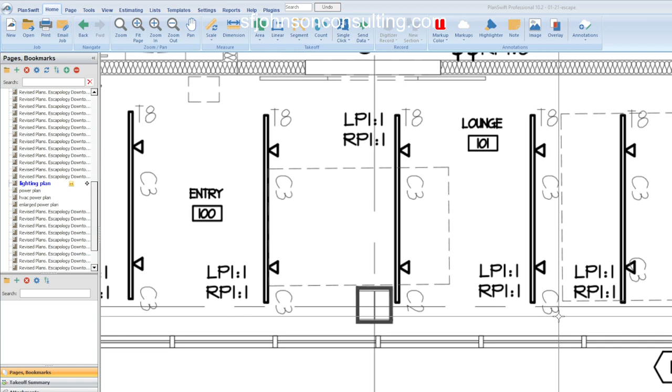But when it comes to electrical, you have a lot of challenges. The conduit, the wire, how do you determine all these different things - if you're an electrician, you should know what this means. But you may not be an electrician that has time to do this. So let me show you why you should either hire me to do your estimates, pretty simple, or let me teach you, which is even better.

As you know, with your electrical plan, you have your lighting plan, which we're looking at right now. We have to be able to determine, we can count, and if you have a good counting tool, as you've seen me count a million times, the counting is easy. The part that's not so easy and that's challenging - if you're interested in purchasing a study package for your trade, email me at education@sfjohnsonconsulting.com.

This week, me and my team are working on a Walmart, Dutch Bros, and this one right here, Escapology, I guess. If you're interested in our 3-step process, having it on your whole study package you can keep and go to forever, yes, I'm going to go through everything as if I'm teaching you, and you'll have the spreadsheet, and you'll have a way to see my way to determine man hours, and you can keep it forever. So the more different and diverse projects that you work on, the better for you.

I think this Escapology is probably like a massage therapy kind of place, I don't really know. And it comes to a set of plans - a set of plans is a set of plans. All right, so lighting plan.

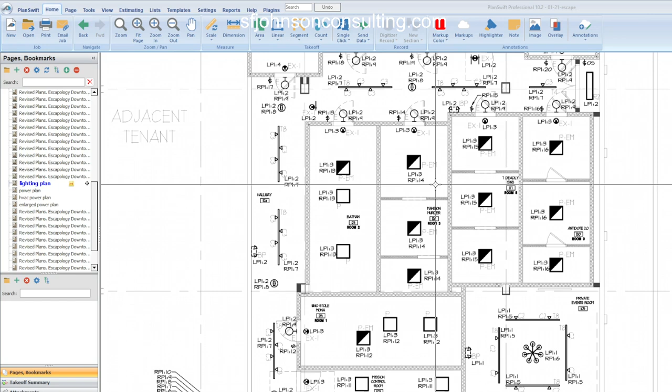We can count all day, and again, you'll see my study video if you choose, to see how I did the lights. This one, the emergency light's different than that one, and that's how we do it.

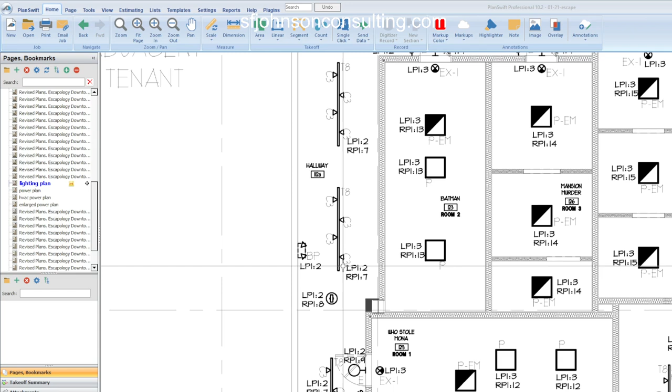If we have track lighting, what's the proper way to account for it in terms of your takeoff? Well, it really depends on if it's standard. If you've got 10,000 different lengths of track lighting, but I don't think we do here, I think all of these are pretty much the same length, T8, T12, whatever. Yeah, they're probably all 8 foot, or maybe some are a little shorter. No, it looks like they're all T8, which makes it easy, because you want to do the takeoff based on how you have to buy the material.

When it comes to placing the labor for setting the T8, it's separated from the labor to set our C2s and C3s into the track. You want to make sure you separate all that stuff. And that's just the lighting plan. This one's a little complicated.

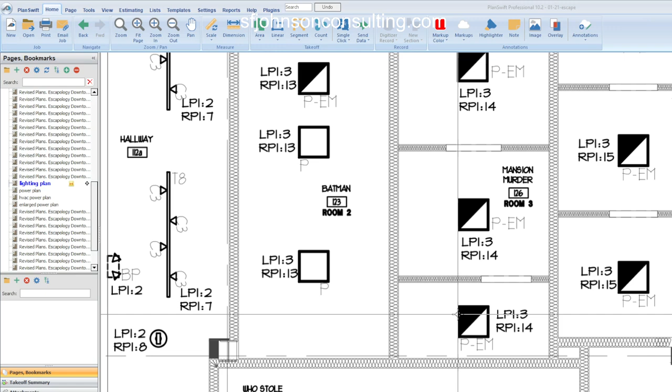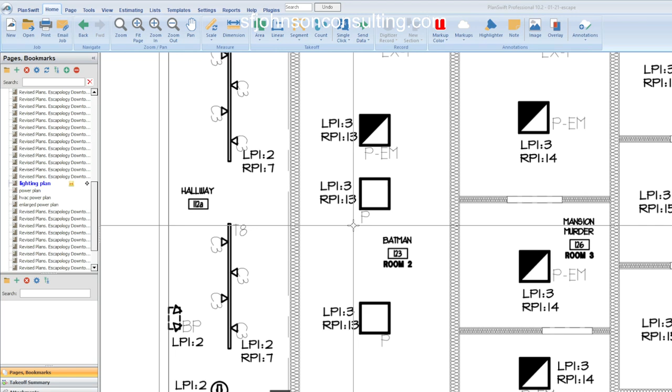Now, in terms of our conduit and wire, we have to understand how lighting circuitry works, basically they're telling us how the lights are connected based on the subscripts that they have on it. When you take my class, you'll understand how I run the stuff, and it's pretty close enough. Add 10% like most things, and you're close enough.

How you run it, do I run it horizontally or vertically? Well, it really depends on a few things, how it's noted here. And in terms of lighting, a lot of the same lights, even in different rooms, are controlled by the same lighting control.

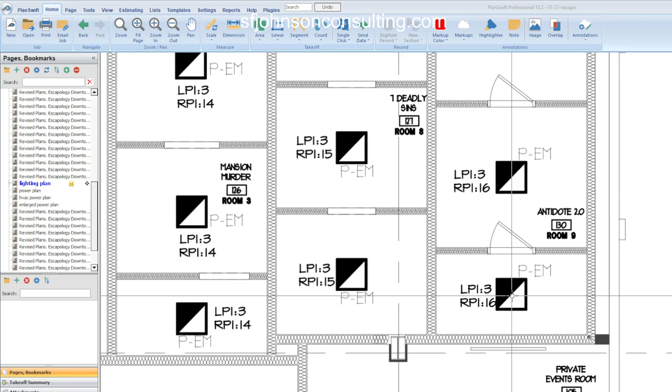That's the most difficult part when we talk about electrical estimating: you want to be able to give it a sufficient amount that if you were the estimator, and hopefully if you were the electrician, and hopefully you have a good relationship with your electrician, you can say, hey look, this is how I ran it. That's why I always give my clients videos.

Hey, this is how I ran the conduit, and as far as the wire configuration, it's in the specs or the plans, or it's standard MC cable for certain parts and number 12s for the home runs. Typically the case, and that's not hard, but that's what you have to think about. And that's a lot to think about.

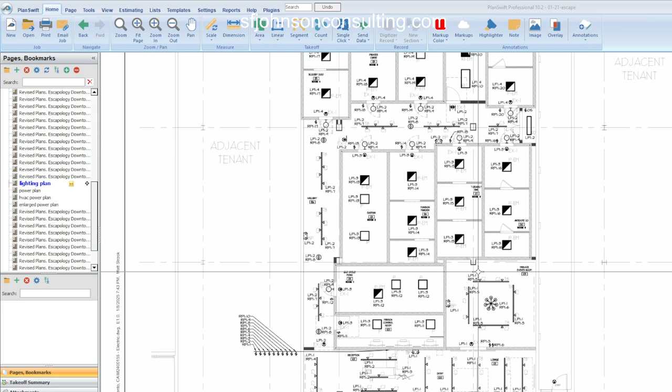Framing, it takes you 5 minutes to figure out how many linear feet of wall A, B, and C, then 2 seconds once you get real good. But this, no, because every set of plans is going to be different, and the way lighting controls are set up is going to be different.

What does this mean? I have to match it up too. But what we have to do is physically run that wire. How would we physically do it? What you want to do is just give the best representation, the cleanest runs.

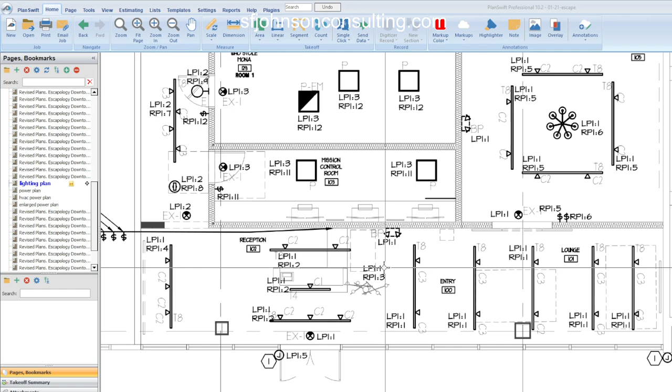You don't want to go all in circles and stuff. You want the cleanest runs you could possibly have that are real life.

If you're really good, you're going to say, how far up does this wall go? Do I have to penetrate the wall in order to get through here if necessary? My son's an electrical tech, and he says sometimes we got to put a hole in the drywall to see, because we think it's free and it's like a cross - I said, bridging.

He's like, yeah, like something going horizontal, not just the vertical studs. And then you end up running into something you got to cut through in order to put the wire through the wall. That's why I like working with people that do it, because you get a practical understanding of what happens every day.

And then you, as the very detailed, anal estimator, can speak with your professional and say, hey look, this is how I did it. Now with video, you can show them, so you can really be competitive.

There are people out there that are using the right tools, doing the stuff as clean as they can, and then going in there and winning. Because what you understand when you win a project, it's not set in stone. You need to make sure you understand that.

If you take my construction law class, contracts and understanding them is very important. There's so much that if you don't have some kind of mentorship, or you don't do it for a couple of good years for somebody that does it well, and then you go out on your own, you're really going to be taken advantage of on so many levels, or you're going to be so lost on how to do certain things.

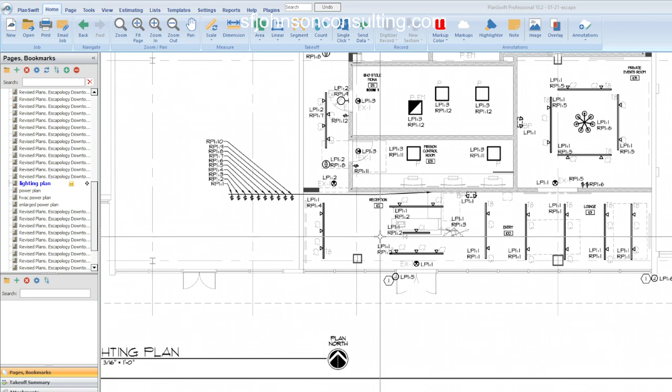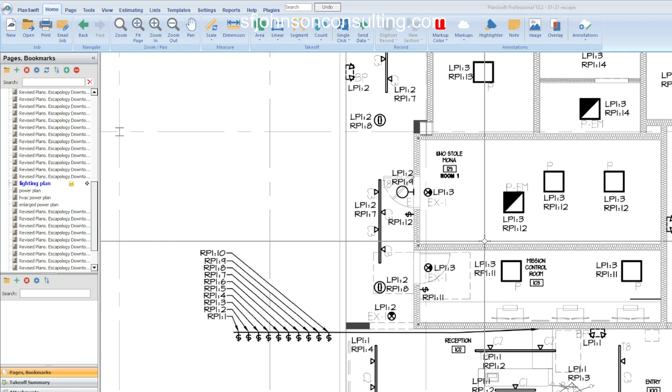Okay, I don't mind sharing my logic and understanding of everything. A lot of people in construction are too competitive to think too far ahead. That's why I don't have the subscribers I should - if I was some other person, I'd have 10 million subscribers. But for some reason in this country, we think if I help you, I'm not helping myself. That's the most ignorant concept we've held onto.

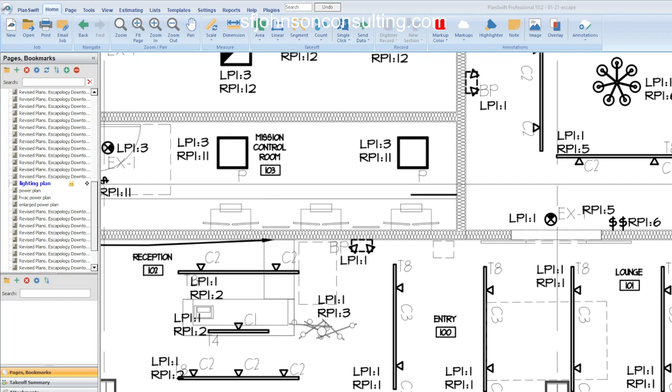We'll keep moving. So what you want to do is make sure you do a lot of projects, and the hardest part is being able to run the conduit. How do you physically get that going? It's easy - after some time, and if you talk to a good professional, a good estimator or electrician you work with, you'll get it.

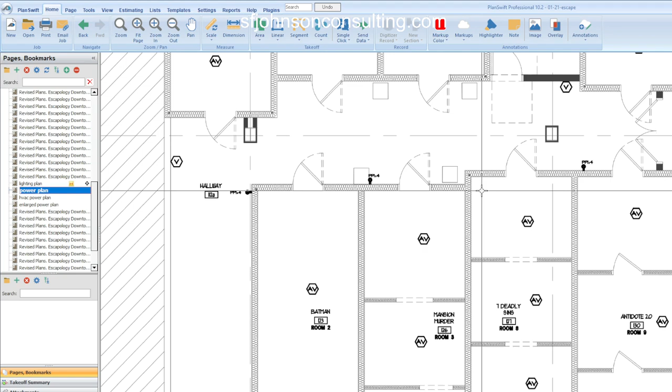All right, so that's just the lighting plan. Now the power plan - depending on how detailed it is, you've got to do a lot of thinking on your own. You have to read the specifications. I'm sure there's some kind of conduit I have to attach, and some kind of junction box that the electrician's got. That's why you read the specifications, or there may be notes.

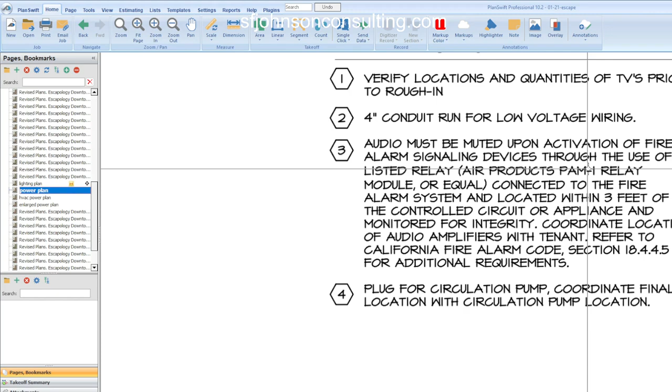4-inch conduit run for low voltage wiring - audio must be... Okay, where's number 2? We know what they're talking about, 4-inch conduit. I'll find it and when I do the video it'll be clear. But again, conduit and wire runs, that's where it's like, okay, what do I do? Because that's a major part of your material cost.

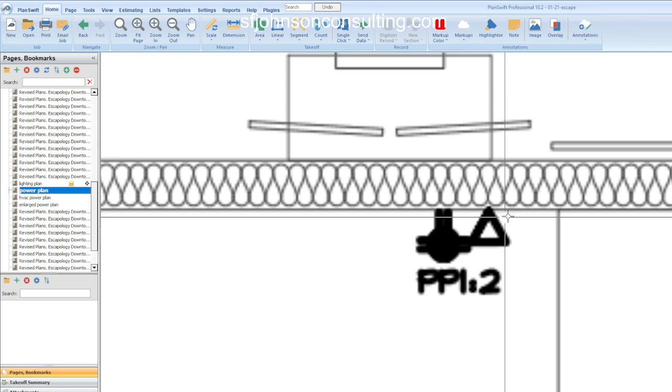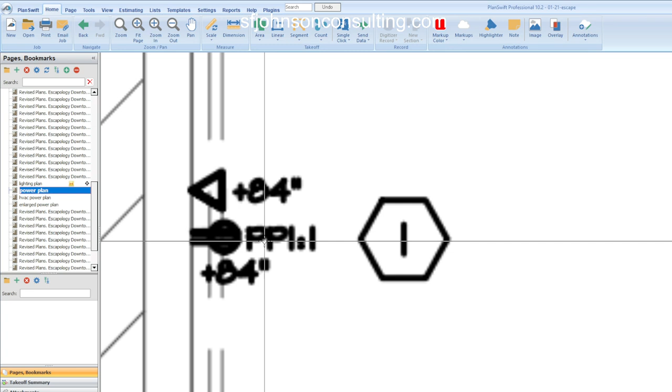How do I take care of this - because if I'm the high voltage electrician, I'm not providing Cat 5, Cat 6, low voltage wire, anything like that. But I have to provide the junction box and conduit to the ceiling in most cases. But as far as running the power for the general purpose outlets - well what is PP1? That tells me, right? It's going, hopefully there's a panel called PP1, and I'm going to position number 1.

Just like the lighting, depending on the subscripts and everything on there, those can be connected together, and then at some point PP1, PP2, whatever - we'll show you in class how we run it to the panel. What's the best way to run it? What's the cleanest way? Because that's the way pretty much a good electrician is going to run it.

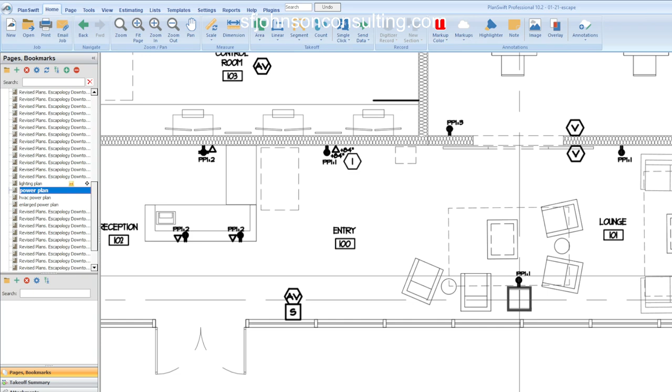And then your second step - what is it? Pricing it and determining man hours. Well, you need another tool for that - just like you have the tool to count and measure lines and stuff, you need another tool for that.

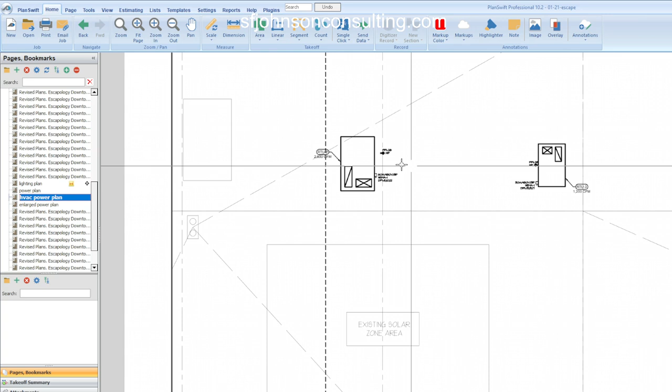And let's never forget the HVAC power, and the disconnects - if they're fused or non-fused or whatever - and the general purpose power that also connects to it. You've got to remember that.

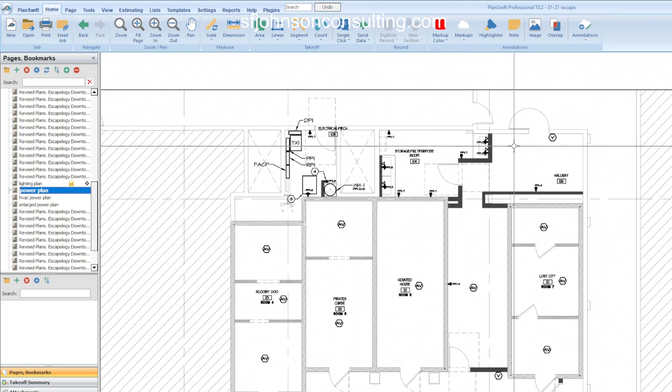Now, I'm out here on top of the roof - where are the panels? You've got to make that a practice. You've got to know how to go back and forth. The only good place, not always, but in most sets of plans, the only place you're going to find the position of your panels is on the power plan.

On the lighting plan, when you're running your home runs for your lights - let's see, I might be wrong, maybe they show you the panels on the lighting plan. No, they don't, right? Because that's just not what they do. But they show you on the power plan, so you have to know when you go back to the lighting plan and you're running your actual home runs, they give you a little outline of them.

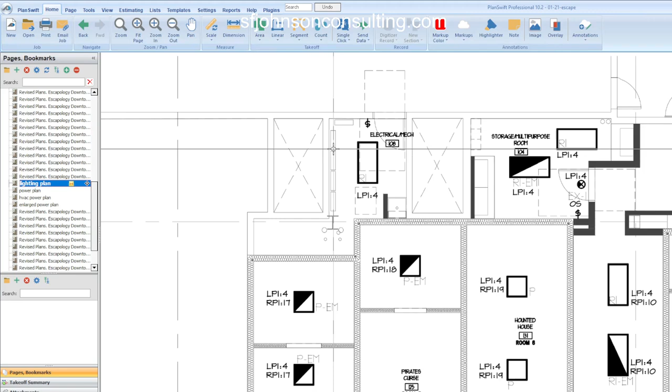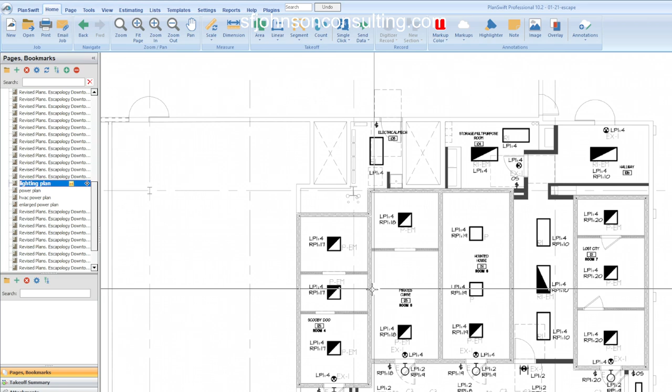But which one's P1, P2, which one's LP1, LP - you've got to go back to your power plan and note it in your brain. Then when you're running your home runs for your lighting plan, you know it's about what - LP1's right here. So I run them all together, and then I run whatever I've determined the home run to be, after I've run these all together.

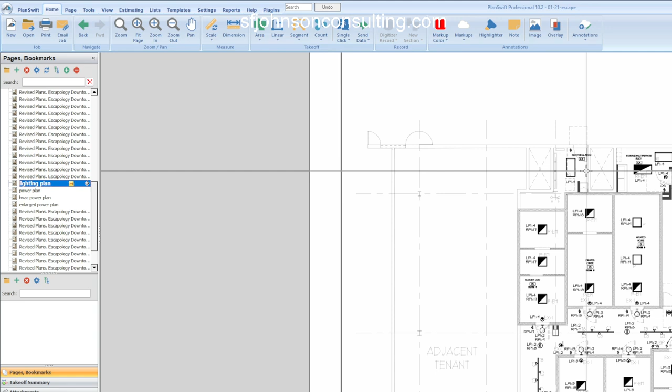For all of the LP1s, we ran them all to this location. We ended it here, and now we're going to run the home runs from here to there - that's how that works. And then you can imagine at the end of it, you can't see lights or anything because all you see is all of your runs, where this is easier, much easier - not a lot of outlets, which is beautiful.

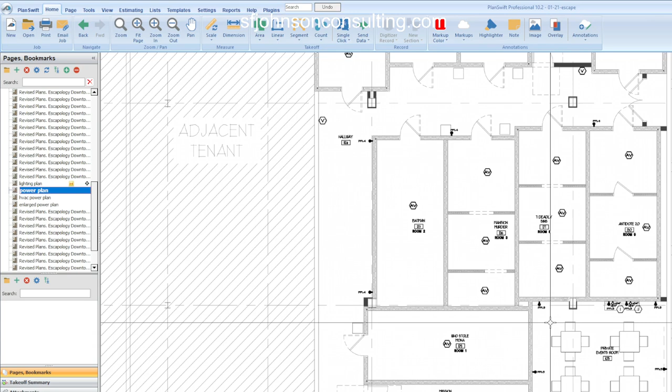And so we connect all of those in what we call series, all together. And then at some point when we figure where the end of the P4s are, we run it to the home run. Add 10%, don't worry about the vertical runs up and down the wall, even though it has good enlarged plans to show you exactly.

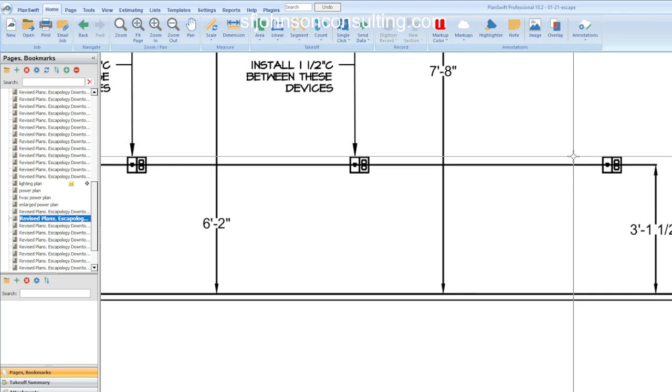Well, it's probably standard that the light and any devices standard 3.5 feet above finished floor, and so what they did is give us enlarged plans, but we don't really need that, they only do that. This is for the actual electrician now when he has to go and do the work. Well, now I can do my actual measurements and determine exactly where everything has to go.

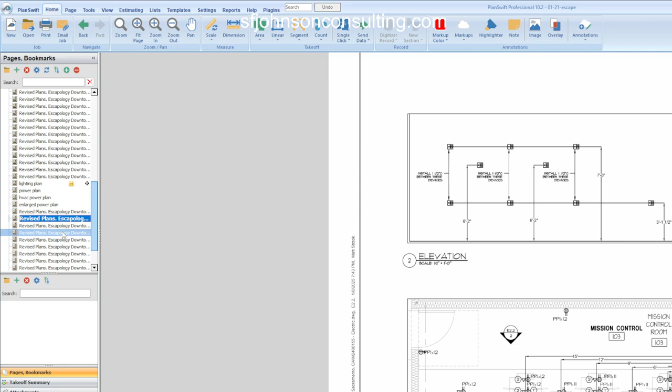And this is what it looks like on the plan. But in the elevation view, in the real life view, that's what it looks like. All right, and I didn't mark it.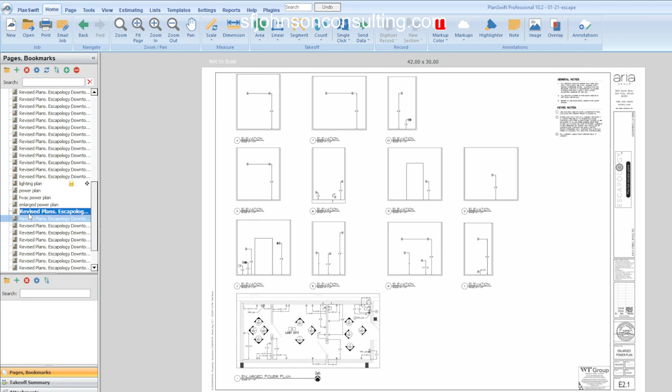Okay, so HVAC plan, all the enlarged plans. Where did I? That's plumbing. Okay, well you just have to go with me on this journey, because the last thing we always have to do is, let me make it easy for my mouse hand.

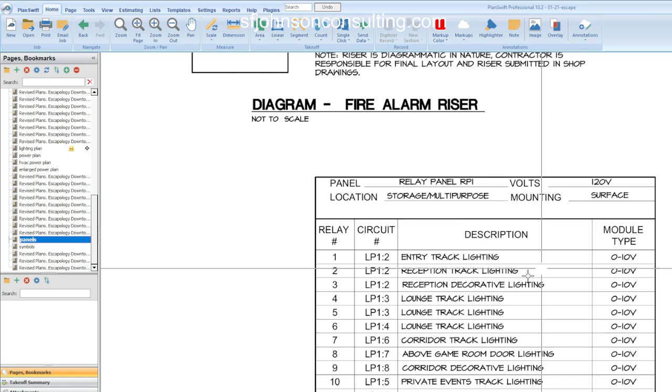We have to look for and find good elevations for, there we go. Oh, I did put it on there. And we have to find all of, okay.

So this tells you your circuitry for the lighting control. That's nice and clean, it's a nice set of plans. All right, so you need our single line, right?

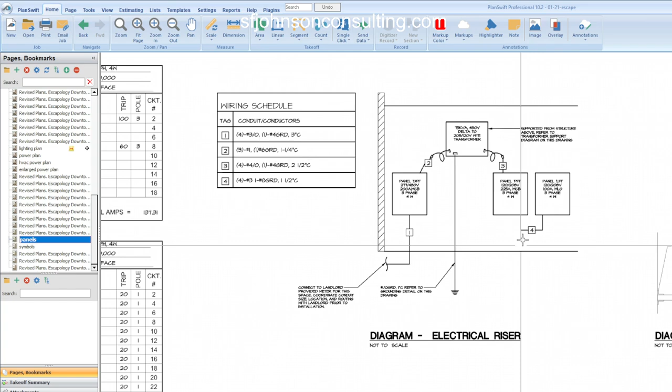So we can determine all of the power feeders. And when we looked on that power plan, these are very close to each other, so it shouldn't be a problem at all. And so the 2, 3, and 4, and 1 should be telling us the wire configuration for each of those.

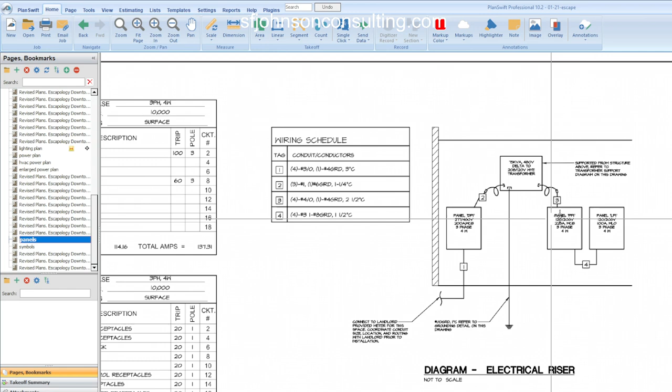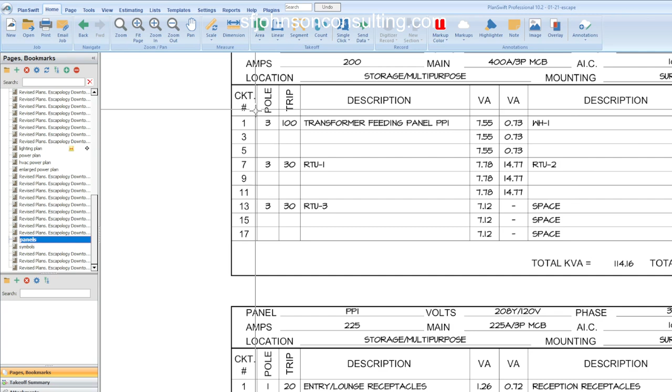But the last step is we got to count our breakers, right? The size and how many poles on both sides. Okay, and we have to be able to determine, based on the number of breakers, our cost book is going to tell us how many man hours we should apply.

42. Now it doesn't take me that long. Okay, good, because the better you get at a thing, it shouldn't take you that long, right? So, but we are saying that this is what the construction industry standard is giving you.

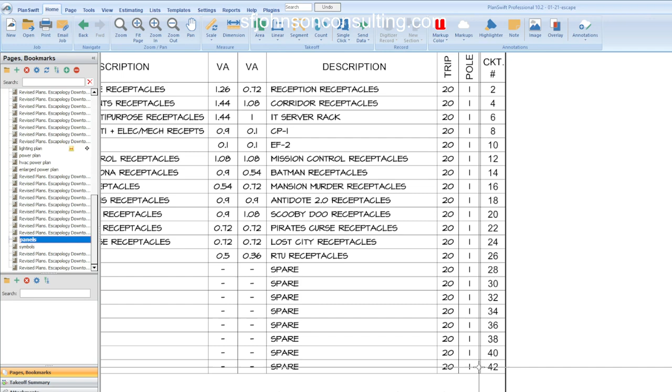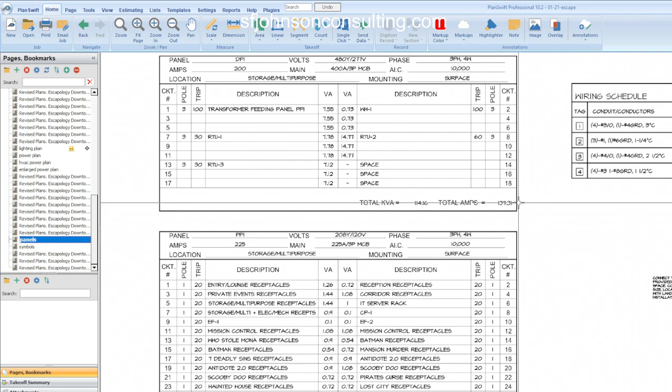And yeah, if it takes you less time, what do you do? You knock those man hours off and you become even more competitive. Okay, and so typically a 42, that's about 15.1 man hours they give you to install a 42 breaker panel. Okay, anything above or below that, I forget, because that's the typical 42 position.

And so, yeah, we got to count all the breakers too. So that's like the last thing. But as you can see, the easiest part, if anything, is just having a really good counting tool.

But now you have to understand and make sure you have a good way and a logical way of determining how many linear feet of your feeders, your MC cable, your number 12, number 8, whatever it is.

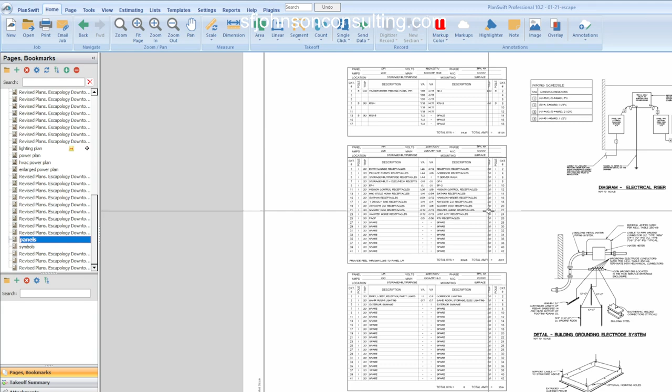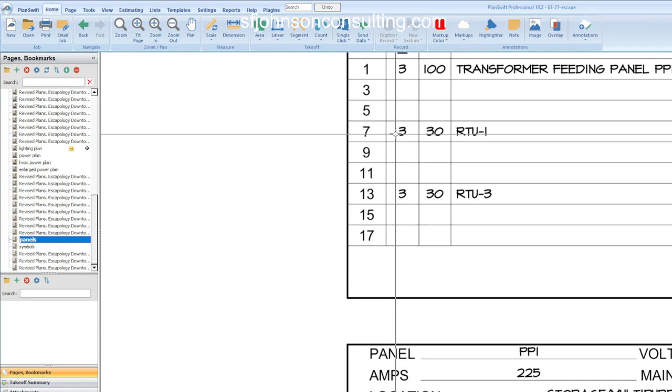And just know that, rule of thumb, if it's a 20 amp one pole, it's typically, the wire running to it is usually a number 12. But if you've got like rooftop unit 3, 3 30, that's telling me that that's not just number 12s.

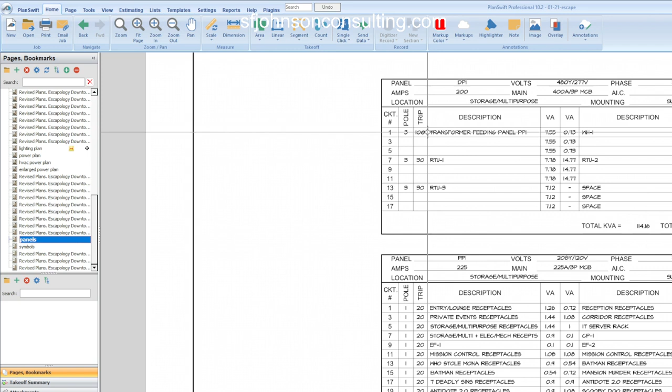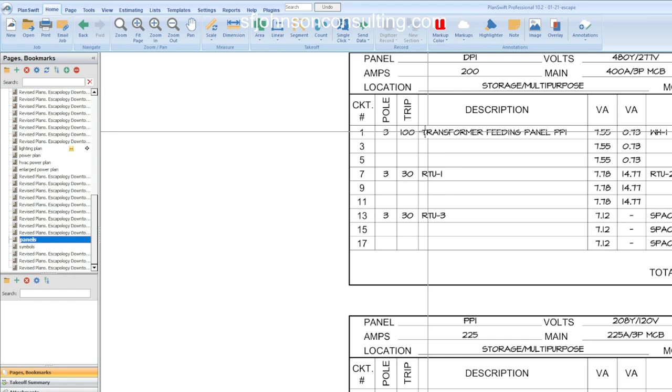Okay, and so you want to go a little deeper than maybe what you're given in the plans. Let your electrician know, or go from past experience, because the electrical estimator isn't an electrician, but electricians can determine, depending on the power consumption of the piece of equipment and a whole bunch of other factors, what the wire configuration should be. So if it's not outright given to you, then you should be able to heads up and get it.

Okay, so typically, again, 20 amp one pole is typically the home run associated with that, and whatever is number 12s, 2 number 12s and 1 number 12 ground.

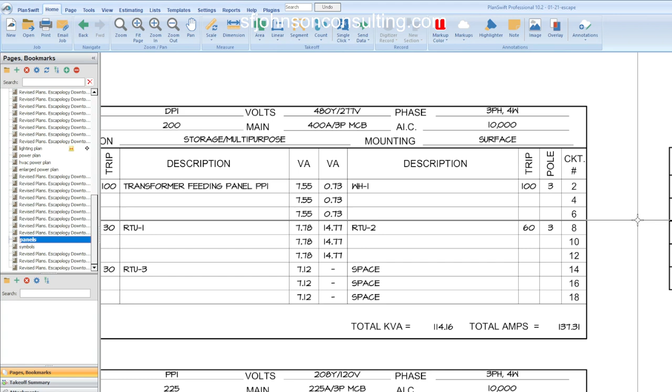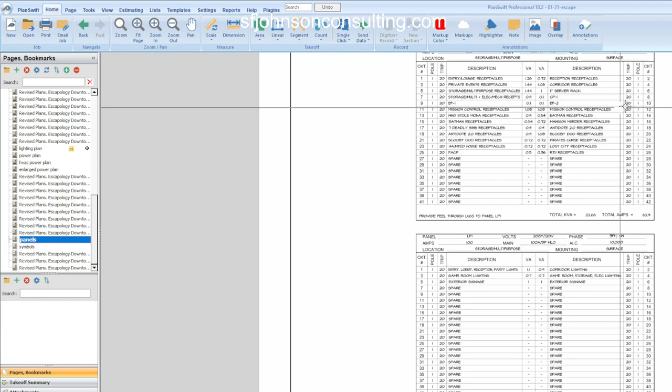Anytime you see more than the one pole breaker, chances are you're going to see the power feeder change. Okay, because it's a number 8, it's a number 10, it's a number 1, it's a number 2, it's something other than number 12. It may be 4 number 12s, but the whole point is a red flag should go off if you see on any of your panels that you are going anything above, even 2 pole.

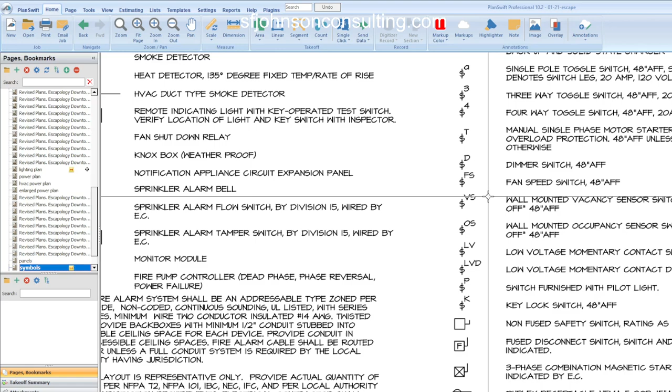All right, and I think that's it. Know your symbols, okay, and usually in the estimate. So, 3-step process: one, counting is easy, okay? What's not so easy are the wire and conduit runs and how to think about your labor costs. Okay, that's not so easy.

So you need to do it for the lighting plan, for the power plan, break out any HVAC, okay, power. And two, if you have a restaurant, which I'm doing a Dutch Bros, which is a crazy restaurant,

your outlets are going to be all over the place, okay? NEMA 15-20P, NEMA 5-15, NEMA. So first thing you want to do when you have restaurants of any kind is go in the power plan and start to break that down, because it's always some crazy configuration on how you have to count your outlets. Always, any restaurant, and that's them.

Dutch Bros, not even a restaurant. I mean, it sells stuff you put in your body, but imagine how a Marie Callender's... oh, they don't have them anymore. Oh, Texas Roadhouse, I love Texas Roadhouse. I got to go at least once. And this show should be sponsored by Texas Roadhouse, where you can pick your steak. Oh my God, and it's just always so good. I don't know about those people.

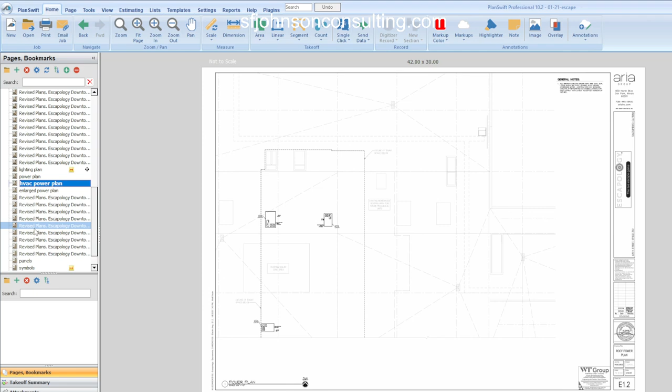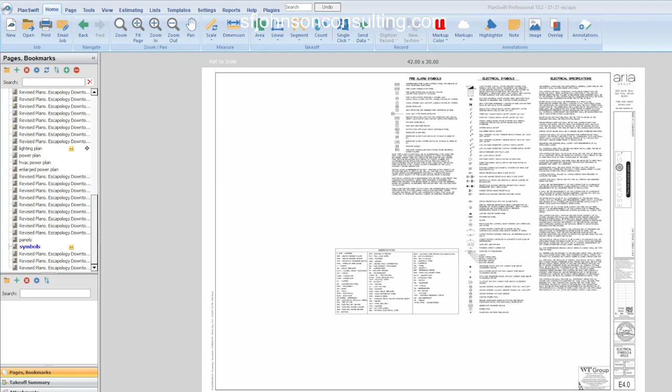All right, so anyway, let's - I guess that's, and the pièce de résistance, okay, that's black French right there - is let's get it over here, the specialized Excel spreadsheet, okay, that will have some stuff filled in for you.

And if you take any of my estimating classes now, I went from 10 weeks to a year, okay, to forever, as long as I'm alive, and you still need to learn, because my clients are self-performers and they miss more classes if we were strict about it than they attend. So I make them videos, got requirements. Hey, our numbers have to match. Okay, if our numbers aren't matching, we have problems.

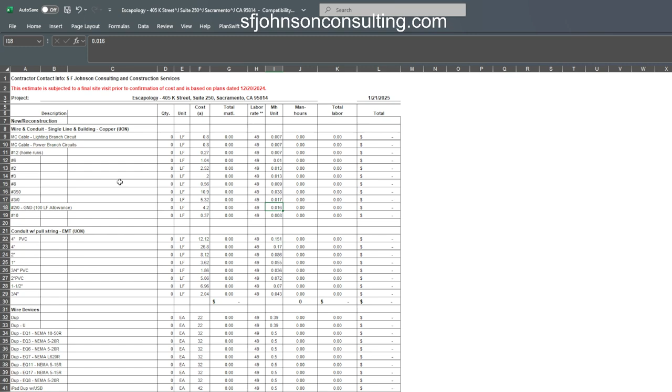Okay, and so when you take a class with me over that period of time, however long it takes you to feel comfortable to branch out on your own, you receive this stuff from me. I'll teach you how to do this, and I'll give you man-hour calculators that are just the wire, that are just the conduit of all kind. And the wiring devices are kind of crazy. So

Us, in the process of doing so many for electrical, because as you know, if you're an electrician, all of your wiring devices are insane. There's so many kinds. So we want to break that into like a book of stuff for wiring devices. And then lighting and panels and switches, not as bad. Okay, but when I teach you, you get this. And I show you how to edit it. And I give it to you if you mess it up.

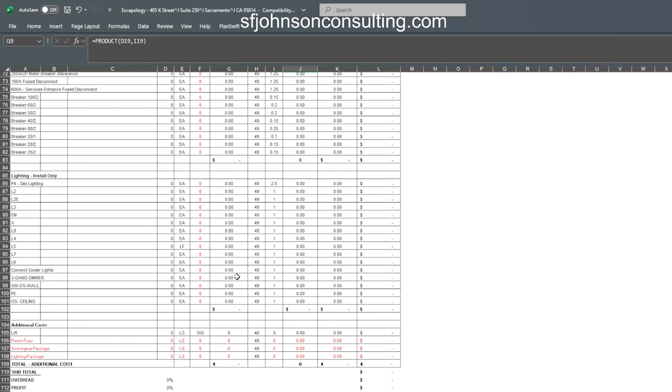And we go over what overhead and profit should actually be. And include - today's overhead and profit is based on last year's direct operating costs. Okay, so it's almost tax season. I've started myself - you should be determining or know really good right now what last year's operating costs are, because those are adjusted every year.

I've been in business 16 years, and some of the years, the amount of money I made blew my mind. And some of the years, I'm like, how did I even survive? So, yeah, those things change over years, and you have to change with it. And one thing I've also noticed is that contractors are horrible with keeping track of any kind of cost. And so if that is you, make sure you reach out,

because I am too, but we got to fix our problems in 2025. And I have, and it's important. It's like you don't want to make so much money that you don't care if you're losing it, and you don't even know it because you don't pay attention. And I think that's a very bad universal principle to have, to not pay attention to how much money you're making. Don't pay so much attention to it to where you're an a-hole, but you need to be aware of how much money you're making every week, every month, and how much you're paying out and to who. Okay, because some of your assistants are ripping you off and then blaming somebody else. Okay, so please pay attention.

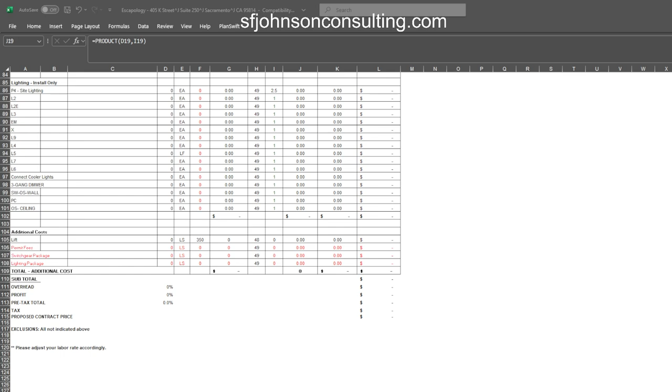But I'd be more than happy to add you to the list of my wonderful students who learn pretty much in like 2 months. So I say forever because, yeah, they learn in like 2 months because I don't play, right? I don't play. I've done it a million times. I really want you to learn. I'm not a hater. There's nothing that benefits me by not teaching you. Okay, it just makes me better and you better too.